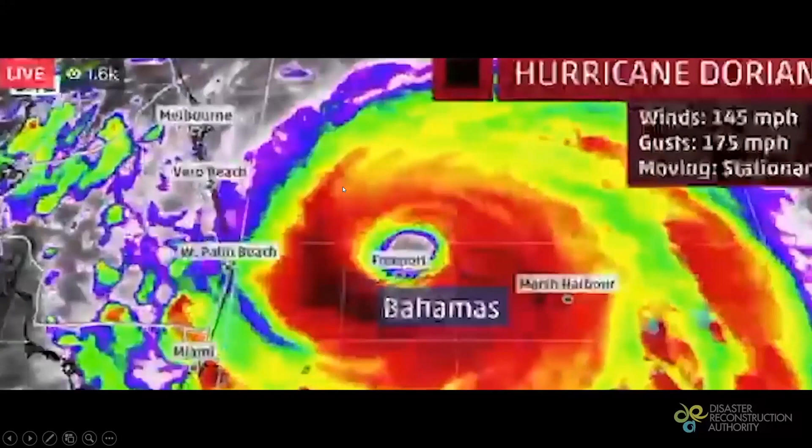It's truly just, there's no words. It's very hard to describe what's going on. People who've been trapped in their houses now for 3 days. Is straight from the gates of hell. There is no other way to explain it.

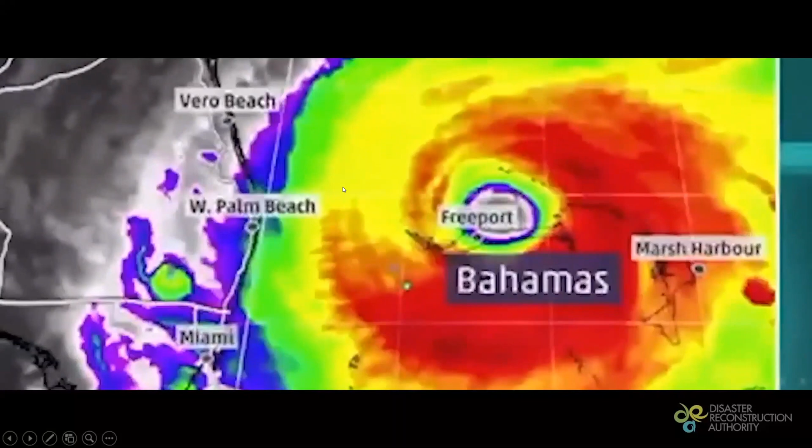Wind gusts of up to 220 miles per hour swept away our people and destroyed property in its wake. Sustained winds exceeded an unheard of 185 miles per hour. Dorian wiped entire communities off of the map. Citizens struggled to help rescue neighbors while rescuing themselves. The death toll and property damage are still unconfirmed. It's staggering and shakes the very foundations of our country.

Immediately after the passing of the storm, the damage was unprecedented, and no one word could truly describe the devastation. Individuals could no longer recognize what they once called home. The sight was heart-wrenching.

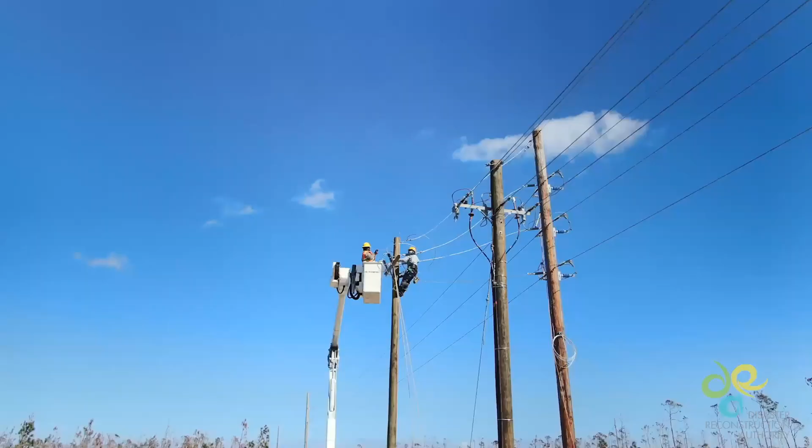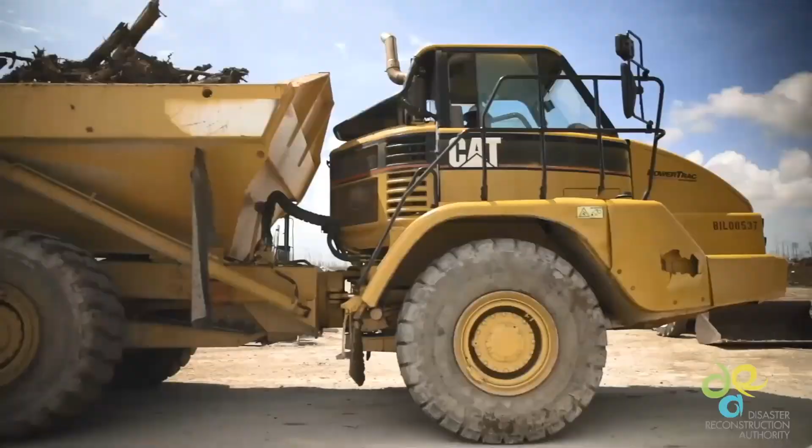Yet, amongst this tragedy, an opportunity arose. Opportunity to rebuild, but better and more resilient than before. Thus, the DRA was formed. With multiple priorities, the first being an extensive cleanup, we started to see hope manifest itself in people, nonprofit organizations, and the future. Our people had to fight to make it through each day on the impacted islands. To this day, those affected deal with chronic mental anxiety from the events that took place.

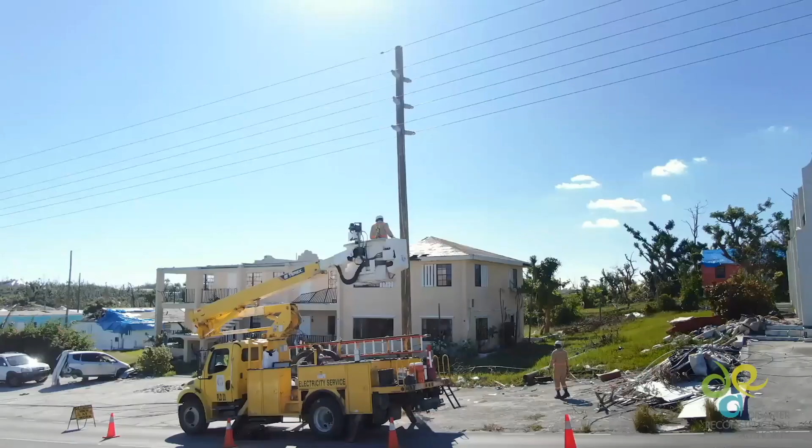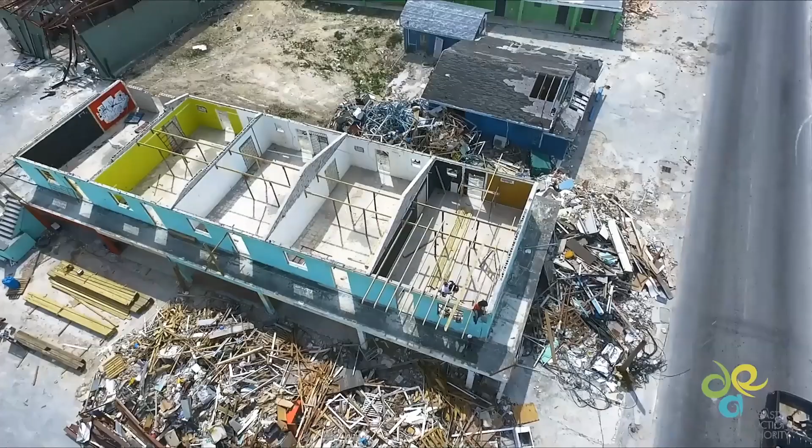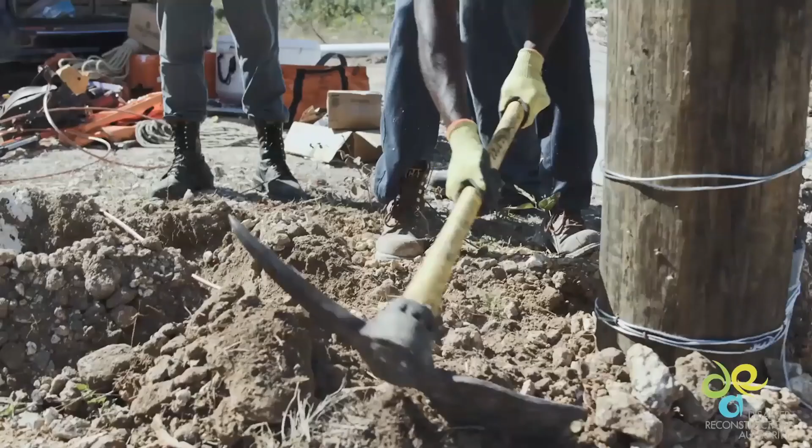We now face the historic challenge of rebuilding after this crisis. The road to recovery will be long and hard. However, the DRA is committed to seeing it through. In the last year, we have helped thousands with home reconstruction, rebuilding schools, environmental cleanup, and even helping families find closure. But the job is not done. It's just getting started. We will rebuild, better and together. We will be better because of this than we ever were before.

Thank you very much. I hope everybody can hear me quite well. I am really pleased that the DRA has been asked to participate in this workshop because I think all of us are very excited about the panelists and to really learn from this workshop.

I'm joined this morning also with the chairman and deputy chairman, John Michael Clarke and Algernon Cargill, and a number of other directors representing other government agencies who have all been working jointly in this journey to rebuilding our northern islands much better. My name, as they've indicated, is Catherine Smith. I'm currently serving as the first managing director for the Disaster Reconstruction Authority, and I hope I'm not the last, because the work on the rebuild is definitely a handful, and it will take quite some time to get through this process.

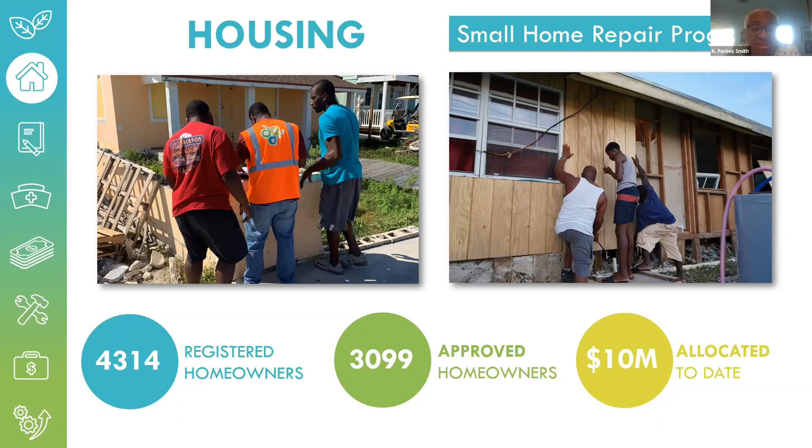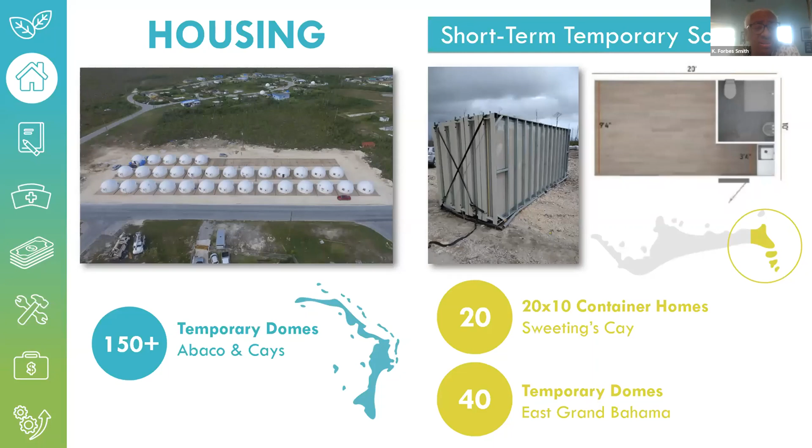The other thing we've had to focus on in the housing arena is that in Abaco, people lost not just their homes, but also the temporary rentals that people had. So we've had to find temporary structures for homeowners so they can rebuild their homes. Right now, we're pleased about the donations we're getting in terms of Sweeting's Cay. We're in the middle of erecting container homes for residents of Sweeting's Cay, and another 40 temporary domes for the residents of East Grand Bahama. And in Abaco, there will be more than 150 domes spread all over the island.

The other thing we're doing is permanent housing solutions. What does that look like? The government of the Bahamas has transferred and conveyed two 60-acre mixed-use residential lots to the DRA for development of permanent housing in Abaco. We're right in the middle of looking at the RFP for that. We've already done pre-qualification notices, so we know where the interest lies. This is a more permanent, long-term solution, but one we hope to start construction on in early January 2021.

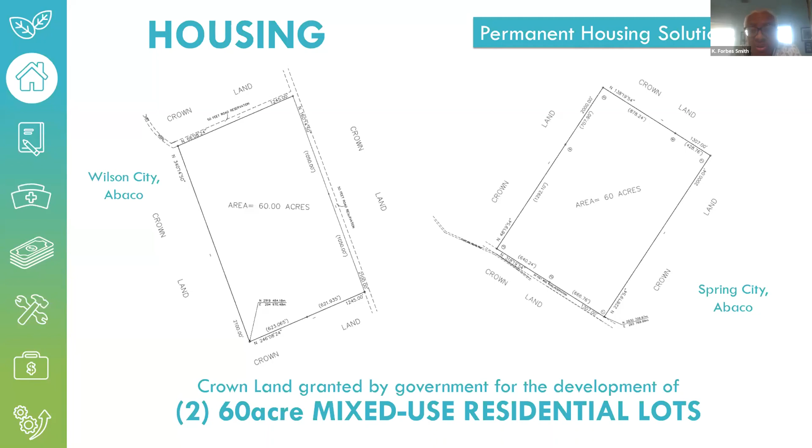The other problem we've had is over the years, church buildings as well as schools have traditionally been used as hurricane shelters, and they're not really constructed for the strength of a Dorian. What we are now doing is looking at the development of community centers as hurricane shelters in Abaco and Grand Bahama. The yellow portion in this picture is where the first community center hurricane shelter will be erected.

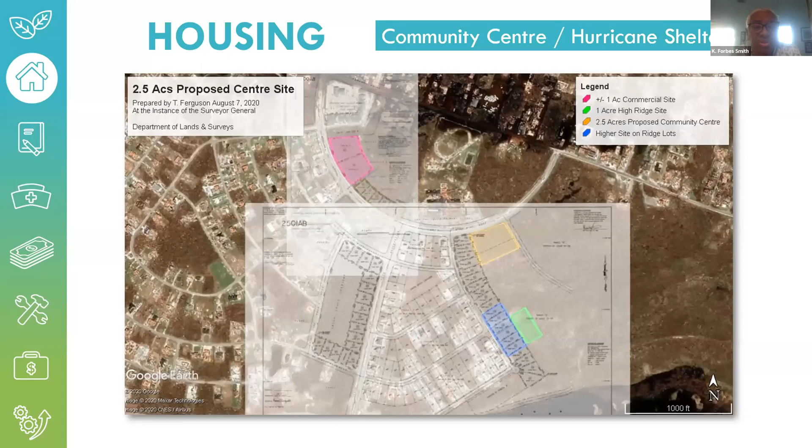That's in the Central Pines area of Abaco. We're working feverishly to come up with a methodology of construction, and the RFPs have already gone out for interested persons. We expect to get them back on September 9th and hopefully begin construction of this community center hurricane shelter by October 1st.

Education is also a big challenge for us because 14 schools were impacted in Abaco. This is one of the new schools in Green Turtle Cay under construction. Patrick J. Bethel School is undergoing major renovations, one of the 14 schools, and of course the Amy Roberts Primary School. What's good to report is that we've had great support from NGOs throughout Abaco and Grand Bahama who have been very instrumental in assisting us with getting schools repaired, NGOs like Global Empowerment and so many others.

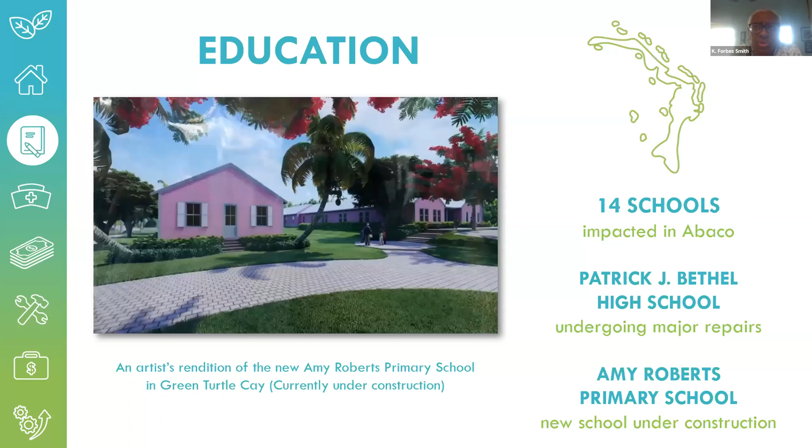In Grand Bahama, we had 17 schools that were impacted. Four of the schools in East Grand Bahama were completely destroyed. It is anticipated that a comprehensive school in East Grand Bahama will replace those four schools.

On health, luckily for us, the government complex and the Marsh Harbor Health Center survived the hurricane in many ways. There was obviously some damage to both buildings, but very minimal. So the medical facilities in Abaco are 100% open and operational.

Our biggest challenge is the Rand Memorial Hospital in Freeport, where it is currently undergoing a renovation program of $10 million. We're also looking at a risk assessment to determine whether a new hospital will be built at its current location or at a new site in Freeport. But this hospital is paramount for the future development of Freeport.

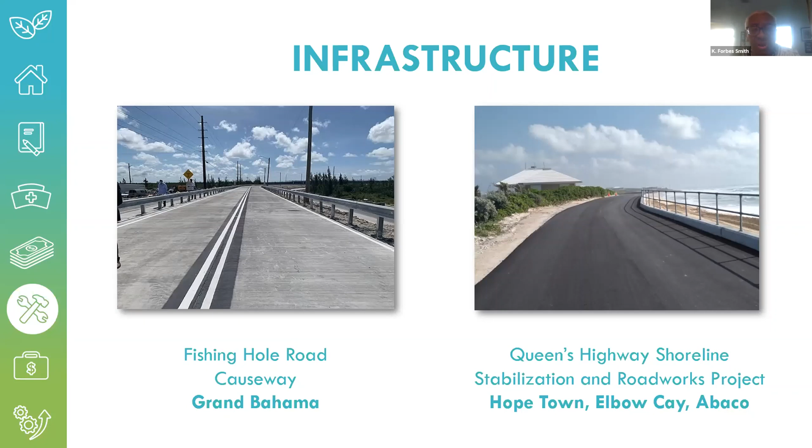On infrastructure, many people in the Bahamas know about Fishing Hole Road and what it looked like, and the stabilization and roadworks project currently going on in Hope Town and Elbow Cay. But sadly, when you look at the priorities we needed to concentrate on for the last several months, infrastructure is a priority, but not one we have given the attention it needs, certainly for the future.

Now, fundraising is a big deal for us. Everybody knows about the infamous pledge conference, where people felt we collected $1.77 billion in cash, which never happened. But our development office is actively trying to secure fundraising. It's been a very challenging and difficult time, particularly COVID-19 has not helped us, but we are still working on fundraising. We see that the fundraising efforts of the DRA are going to be so important as we continue our work.

System improvement is something that, as we have been doing our work in the DRA and going from community to community, some of the things that we really have to look at as a country is how we handle municipal waste barging from these isolated cays, the whole issue of solar energy. Abaco definitely needs a landfill.

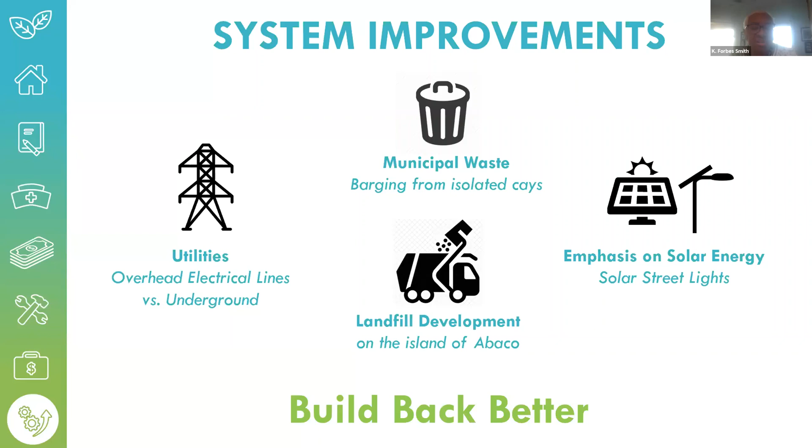Absolutely. Our people, even though construction was continued in the disaster zones, you still have a sense that your staff need to be very careful. One of my biggest issues with fundraising is how do we match donor funding, and how do we get donors to be more aligned with the DRA priorities?

And of course, the minister also talked a lot about how the ministry came into existence. What I find, and what I've found since taking on this role, is that coordination is a major issue, particularly when you have existing government agencies with responsibilities for a lot of these things we are now finding ourselves doing. We need to find a way to better coordinate, because the DRA is supposed to be the lead agency in the country for rebuilding. But the question is, how do you coordinate better with other government agencies?

Incineration has been something a lot of people have talked about in terms of how we get rid of the debris quickly. We need to explore options for the elimination of all of the Dorian debris. And then, of course, transition to normalcy - how do we get homeowners and the country to understand these recovery contracts have to end, municipal services have to resume, and homeowners have to take responsibility for their construction materials now that they're going back into rebuilding.

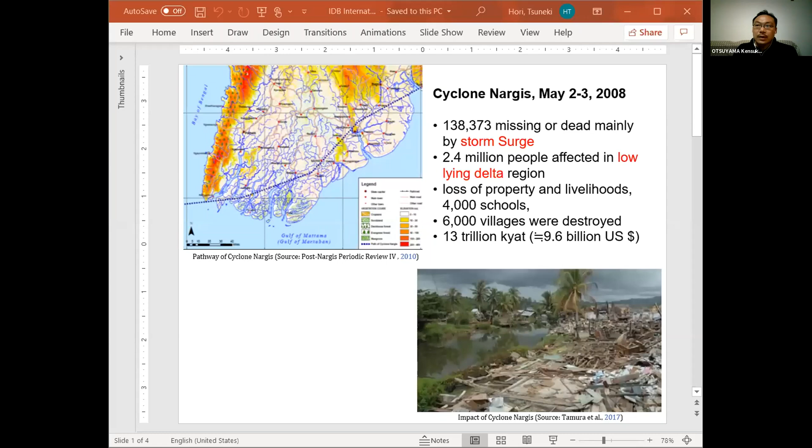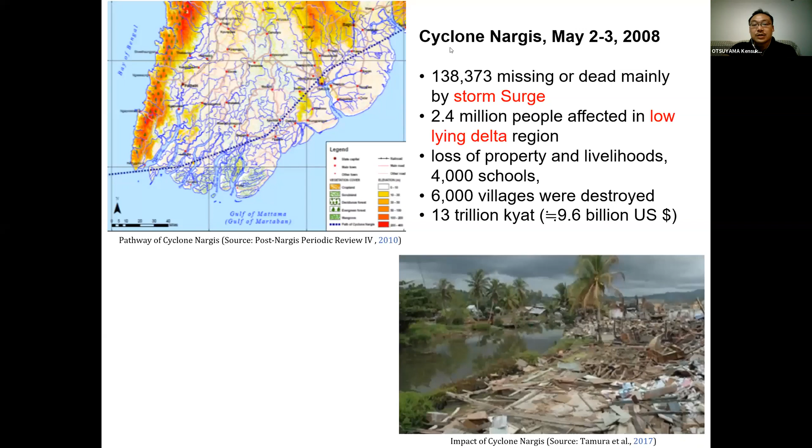My name is Otsuyama, and I am one of the specialists of recovery and reconstruction. I selected Cyclone Nargis in Myanmar because it was the worst disaster in the country, but I think it is also one of the entry points or turning points of the country in terms of disaster risk reduction policies and implementation. I'd like to talk about what happened about 12 years ago, in 2008. More than 138,000 people missing and killed, mainly because of storm surge, and more than 2.4 million people affected because it's a low-lying delta, lower than 3 meters or less than 10 feet. Some research says 82% of houses were destroyed because of this event, and 9.6 billion US dollars was the cost of this impact. So maybe you can find some similarity with what happened in the Bahamas. It was really a huge tragedy in the country, but I think this is a transformation point or entry point to change the country. I will show you later the evidence of what happened. Thank you.

Thank you, Dr. Otsuyama. Tanaka-san, if I can pass the baton to you, can you tell us what case study you've selected and what was the scale of the impact of that event that you've selected to talk about?

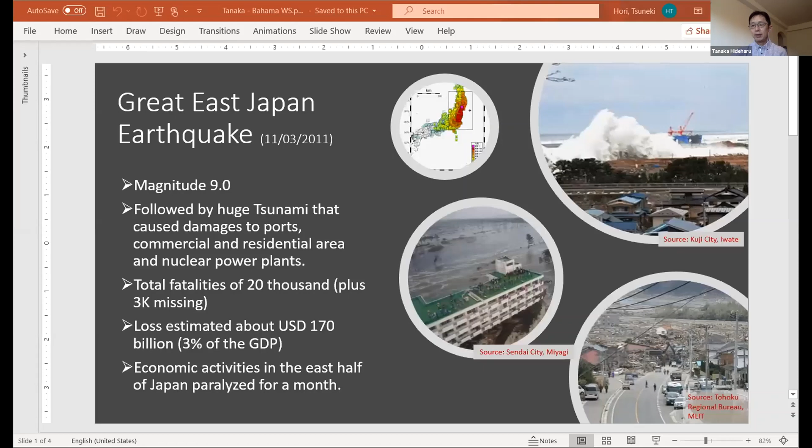Yes, thank you, Yuri-san, and good morning to everyone. It's a very great pleasure and honor to join this workshop. As Yuri-san introduced, I will talk about the Great East Japan earthquake that happened in March 2011. The scale of damage was very huge, and in fact it is estimated to be a once-in-1,000-years event. In addition to the earthquake itself, the huge tsunami in the aftermath of the earthquake impacted a lot, sweeping away lives and properties mainly in the coastal area of East Japan. In order to achieve recovery and reconstruction, we needed to mobilize full resources from the country, and this required introduction of a new legal and institutional framework. I was working at the Cabinet Legislation Bureau at that time, drafting the introduction of this new framework. So I hope my presentation will help the Bahamas experience. Thank you very much.

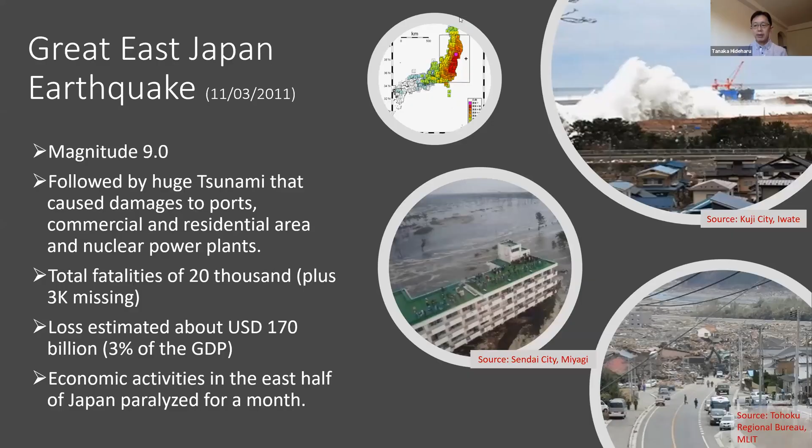Okay, thank you very much, Tanaka-san. And Director Best, I was just wondering what you might like to share in terms of a case study from the CDB today. Sure, thanks so much, Chair.

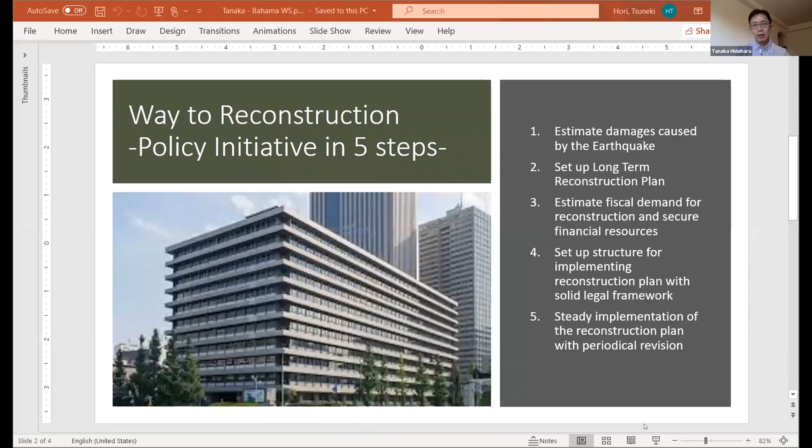Yes, thank you very much, Yuri-san. I will explain policy initiatives by the government of Japan in 5 steps with a timeline, and it took very long time. In the first step, the starting point is to estimate damages caused by the earthquake. The Cabinet Office of Japan announced the damages caused by the earthquake amounted to US dollar 170 billion, and the announcement was made 3 months after the earthquake. So it took 3 months just to estimate damages.

The second step was to set up a long-term reconstruction plan. It took another 1 month to set up this plan. 3 months after the earthquake, the Parliament of Japan approved the so-called Basic Law for Reconstruction. Based on this Basic Law, at the end of July, more than 4 months from the earthquake, the Cabinet adopted the Basic Plan for Reconstruction. This plan covers 10 years, with the first 5 years as an intensive reconstruction period.

The third point is done in parallel with the second step: estimate fiscal demand for reconstruction and secure financial resources. It's very difficult to secure financial resources and mobilize a fund. The estimate was US dollar 190 billion to be spent during the 10-year period of the plan. In the short term, the government of Japan can finance it by issuing government bonds, but it has to be repaid.

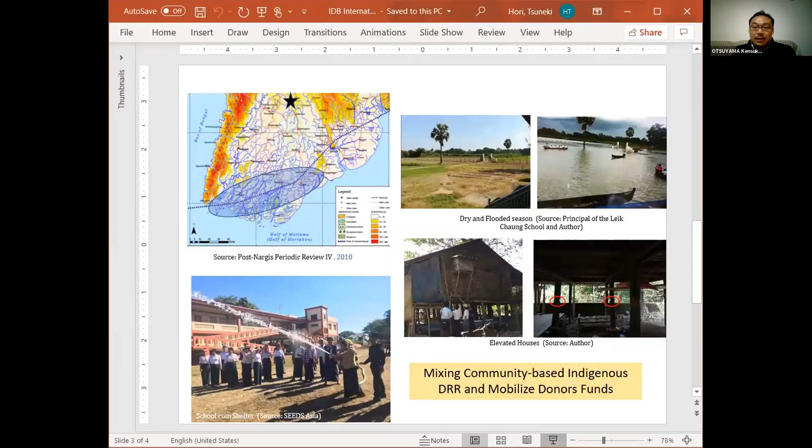So the biggest challenge was long-term resilience. This is what Mr. Best mentioned earlier. As I mentioned, what happened in 2015, seven years after Cyclone Nargis - actually we don't know what natural hazard will impact where, we can only anticipate. The flood impact was in the northern part from Cyclone Nargis, you can find the black star on the map. Actually, recovery effort was enough in the Delta region, but it wasn't implemented in the non-impacted place. As you can see in these pictures, the area is always suffering from floods, and the villagers built elevated houses on their own. So it means recovery effort in the impacted area works, of course, but the point is how it is implemented in another place where something might happen in the future.

So in this village, an international NGO supported constructing an elementary school which is kind of the center point in the village. But the most important thing is actually human resources. I have experience researching in this village, and I met a person - he maybe graduated elementary school or middle school, maybe he doesn't know about disasters, but actually he was trained in the center.

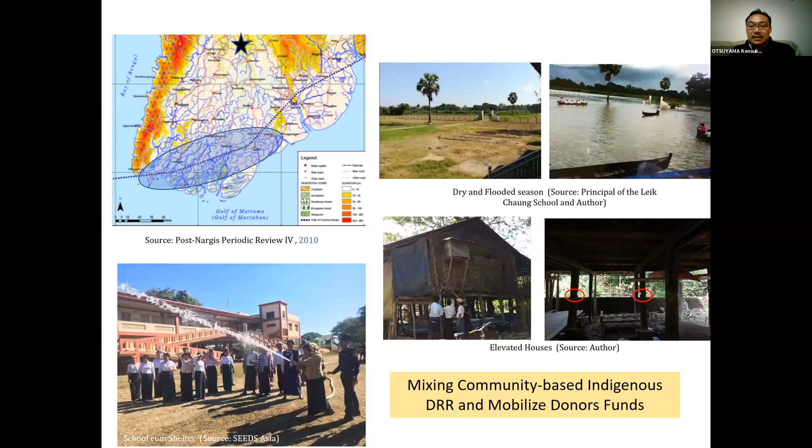Thank you. Thank you, Dr. Otsuyama. Very interesting, that example.

Tanaka-san, I don't know if there are any key challenges and lessons. I know the scale is quite different, and the hazard is quite different in this particular example you've chosen, but any particular recommendations you might like to share based on that experience?

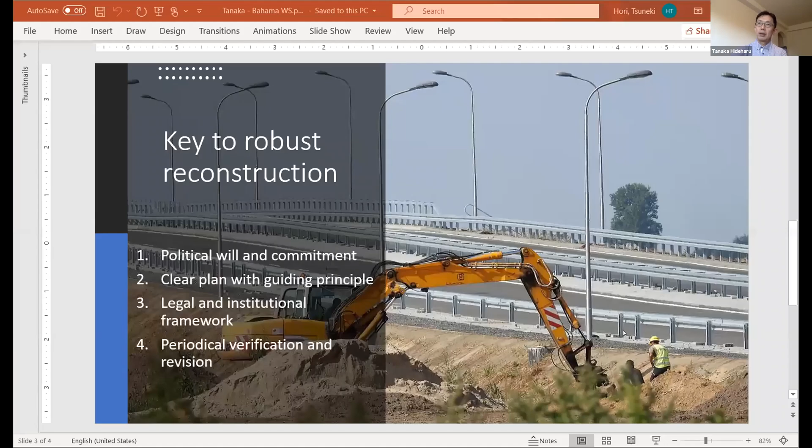Yes, thank you very much, Yuri-san. My recommendation is twofold. First, I will explain the general recommendation to the country, and second, my recommendation is how to set up an institution, especially a reconstruction agency. I'd like to point out 4 points for the country to achieve robust reconstruction.

The first point is to ensure political will and commitment. In case of Japan, the Prime Minister acted as chairperson of the Emergency Response Headquarters and then chairperson of the Council for Promoting Reconstruction. All the ministers worked as members of this headquarters and council, ensuring they are informed and committed to the reconstruction. In case of Bahamas, the presence of Honorable Minister Luis here is very encouraging for me to show the political will. So it's very good.

The second point is a clear plan with a guiding principle. We had a basic plan for reconstruction based on the principle of build back better. This sort of clear plan is definitely required.

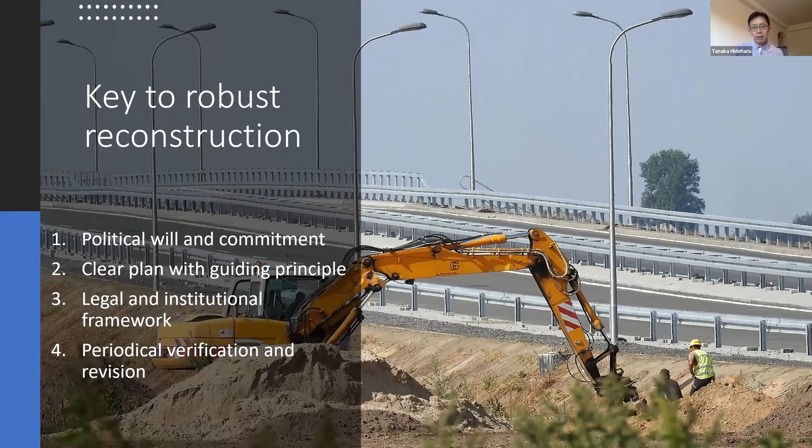And then I turn to a 3-point recommendation, rather pragmatic ones, for institutional framework. The Reconstruction Agency in Japan is working very well so far. The features of the agency, I can point out three important issues.

The first one is clear and strong mandate. This newly created agency has a proper minister in charge, and also has clear authority and mandate. For example, the agency has the power to make recommendations to other ministries and local governments as well.

And the second point is budget management. We created special accounts for reconstruction, and all revenue and expenditure related to reconstruction are included in this special account, with the Reconstruction Agency serving as manager. This ensures that financial resources are properly managed.

The last but not least, recruitment of staff is important. Since the agency is newly created, we have to recruit staff with expertise. The agency has more than 200 staff, and almost all of them are seconded from relevant ministries, for example Construction, Agriculture and Fishery, Home Affairs, Commerce, and also Finance.